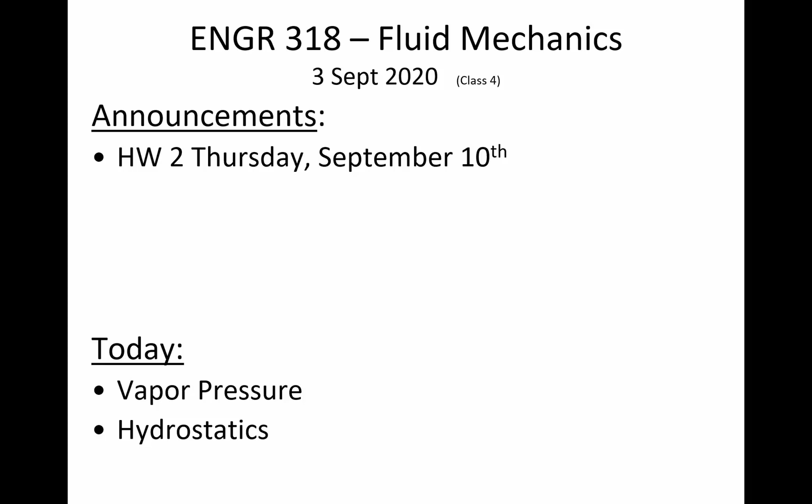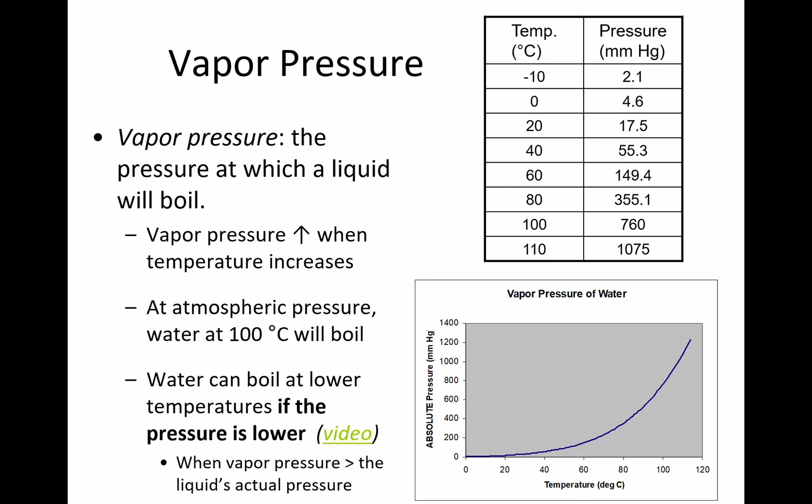If we're talking about vapor pressure, you really do need to know the temperature. Sometimes you could assume room temperature - that's a pretty default assumption. If you don't have any other data, it would be 20 degrees Celsius. But for vapor pressure problems, most of the time you will see a temperature specified.

Now let's look at a video of water being boiled. This is a little different from how you've seen boiling water before. You've probably boiled pasta, but in this video the person is going to boil pasta without heating up the water. They're going to do something different to boil it.

Instead of heating up the water, they're going to suck the surrounding atmosphere away from the water so there isn't air pushing down against it, allowing the molecules of the liquid water to escape more freely into the sealed vacuum above it. So let's take a look at this.

Okay, there we go. So if you have a liquid going into a gas, it cools off - it requires energy to do that. If you leave this running for a long time, the liquid will actually freeze. It's boiling, but the temperature is gradually going lower and lower because it's consuming kinetic energy to go into the gas phase. It's a complicated situation, but the main thing I wanted to point out is this concept of vapor pressure. This water is probably at 20 degrees Celsius.

In the back of your book there's an appendix table, Table A5, with vapor pressure values for a variety of different temperatures. One thing I failed to mention is that even when water is frozen, it still has some vapor pressure, and water does evaporate from ice, very slowly. In northern territories like Alaska and northern Canada, you can wash your clothes and put them outside on a line, and they'll freeze, but the water will eventually evaporate. That process of going directly from a solid to a gas is called sublimation. The vapor pressure of -10 degree Celsius water is 2.1 millimeters of mercury, so it won't evaporate quickly, but it will still evaporate.

So we looked at pasta boiling. Let's look at another manifestation of the vapor pressure of water. This video is taken in Yellowknife, Canada, one of the really cold parts of Canada. This person has a tea kettle of boiling water, and they're going to illustrate how quickly water can go into the vapor phase when there's a large differential between the air temperature and the liquid temperature. If the temperature gets down to maybe -10 degrees Fahrenheit, the water is going to evaporate really quickly.

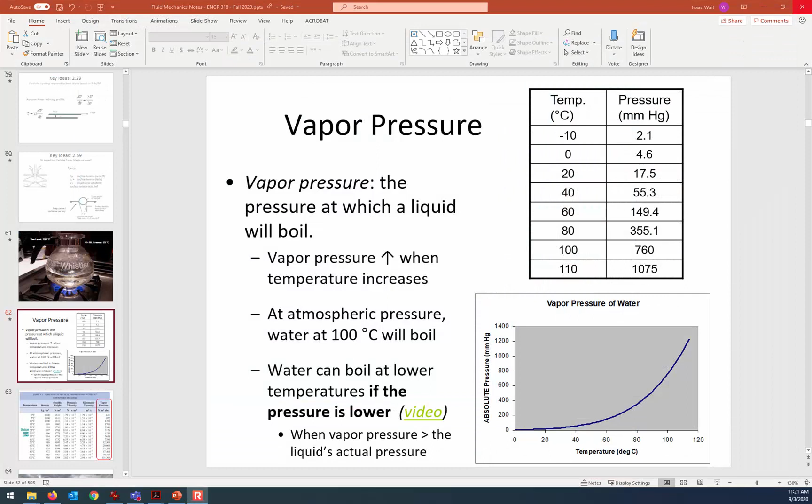Now this is interesting, but it has applications that go beyond just the gee-whiz of throwing water into the air or boiling pasta at room temperature. There's more to it than that. One of the really important engineering implications of vapor pressure is a process called cavitation. We're going to talk about what cavitation is and some of the problems it can cause by looking at a case study of a dam in Russia.

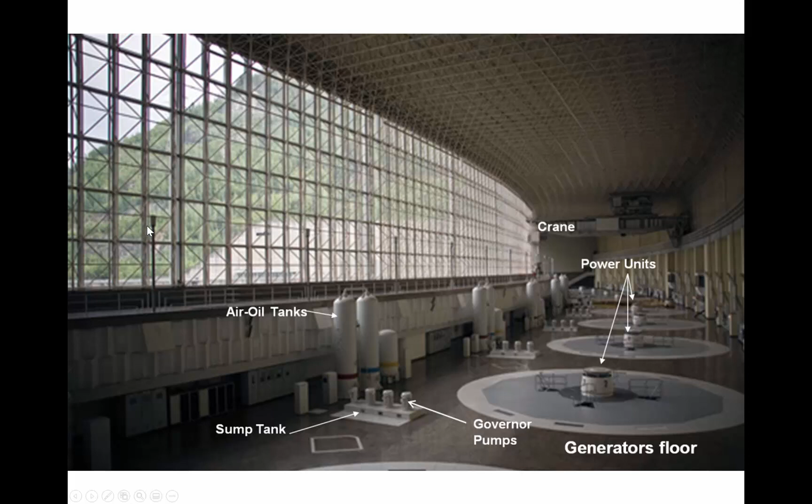This is a dam that generates quite a lot of hydroelectricity in Russia. I'm not going to attempt to pronounce its name because I don't speak Russian, but you can see the power lines coming off of this dam are an indicator that it's an important source of electricity for the industry in that part of Russia. This is a before photo. That's ominous, right?

There are generators built into the floor, and the way the dam works is that water goes through these pipes and moves at a very fast speed. The difference in elevation between the reservoir behind the dam and the water downstream, combined with the flow of the water, creates a pressure and spins the turbine in these generators. The spinning turbine is converted to electricity. It's hydroelectric power, and we have a lot of hydroelectric power in the United States as well.

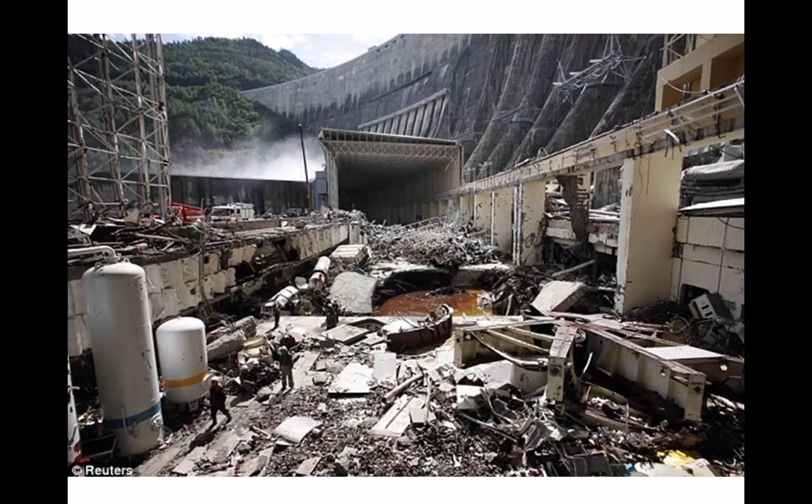This is the after photo of that same location. The only thing that survived, if you look at these tanks, the air oil tanks with the yellow stripe and the blue stripe - okay, here it is, yellow stripe, blue stripe - we still have those tanks, but there's really been a lot of damage. It almost looks like some sort of an explosion. What happened was that the water was moving so quickly through the penstock, which is the name of these pipes in a dam, that carries the water from the reservoir to the turbine.

When water is moving at a really high velocity, the pressure decreases. We'll talk about the details of that when we discuss the Bernoulli equation, which basically is a way of quantifying the relationship between increased velocity and decreased pressure. The pressure of the water going through these penstock tubes became so low that it was lower than the vapor pressure of the liquid. The water was moving so fast through those pipes.

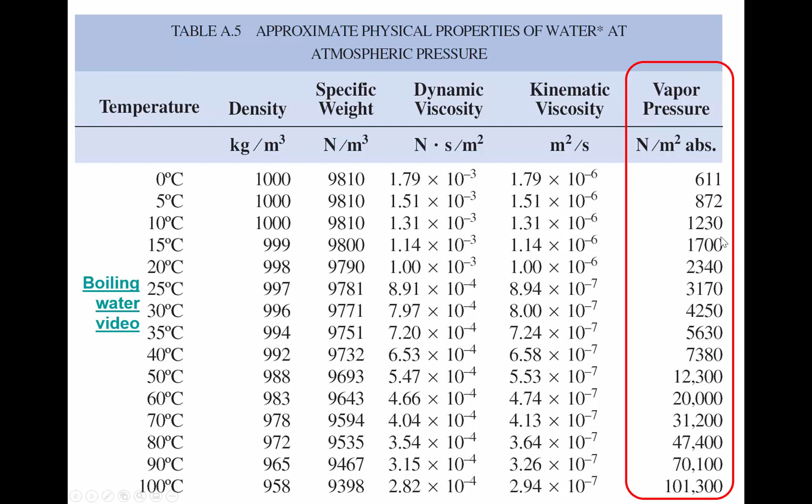I guess it was very rainy in the watershed upstream of the dam, so they had to pass a lot of water through the dam. That dam had been in place for a long time, but this was a unique set of operating circumstances where I think they had one of the turbines closed for maintenance, so water wasn't going through all of the penstocks. There was a greater amount of flow going through any single penstock than there had been before. So the velocity was high, the pressure came down, and the water started to boil inside of that concrete tube.

It wasn't hot, it was boiling in the sense that there was an expansion of liquid water molecules into gaseous molecules. When that gas hit the generator, it caused little shock waves as the gas bubbles collapsed, and it gradually started to scour and erode both the concrete and the steel. It became a real acute failure when the scour and erosion caused an imbalance in one of the fast spinning generators, and from becoming imbalanced, it just ripped right up out of the floor and destroyed everything else.

So the take-home lesson of this case study is that if the absolute pressure of the water falls below the vapor pressure, then cavitation will occur.

Cavitation isn't just something that happens at dams in Russia. It's an effect we see elsewhere. The U.S. Navy is really concerned with cavitation because when you turn the propeller of a submarine or a ship very quickly, when you're accelerating that ship or submarine, little vapor bubbles form on the edge of the propeller, and they can be very noisy. In the case of a submarine, the noise of those bubbles forming and then collapsing is enough to give away an otherwise silent submarine's location. Submarines are always trying to be very stealthy and quiet, not detected, so if there's cavitation on the screw, it can give away their location.

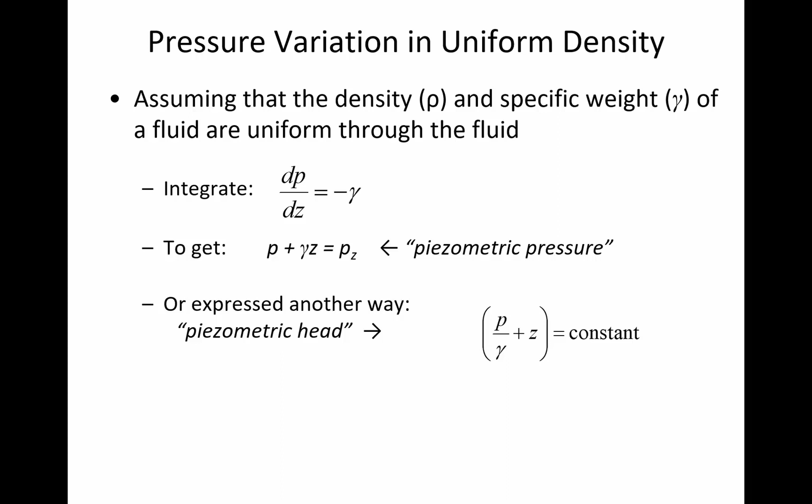So that's piezometric pressure. You can express piezometric pressure a different way if you divide each term by gamma. So pressure divided by gamma plus z, that's piezometric head.

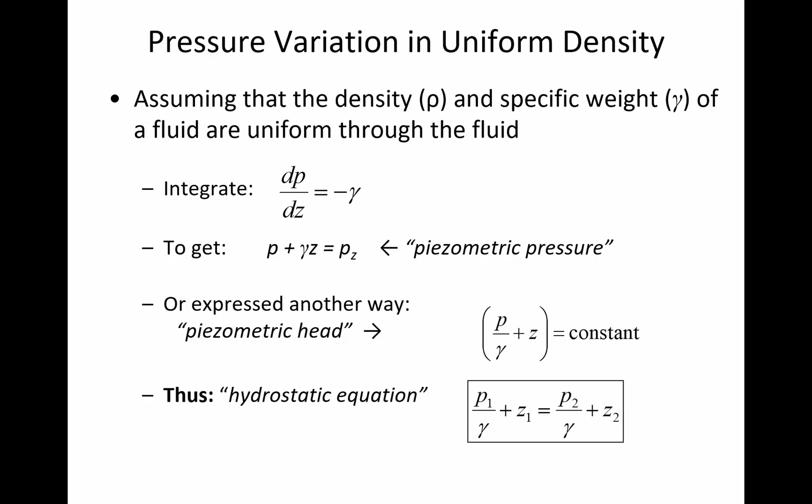So the hydrostatic equation allows us to choose two different points in a fluid and predict how the pressure and elevation is going to change in relation to those two points. So if you know in two locations the pressure, and at one of them the elevation, then you can calculate the elevation of the second location. Any one of those terms can be an unknown.

And so what I mean by that is if you have a tank like this, and let's say location 1 is 34 meters above a datum.

The datum can be the bottom of the tank, sea level, or even the surface of the liquid. It doesn't matter what we use as our basis point for measuring elevation, as long as we use that same basis point for both location 1 and location 2. As long as we're consistent, it doesn't matter which is which.

So let's assume that this tank is at sea level, and we want to know at location 2 what's the gauge pressure and also what's the absolute pressure. Remember on Tuesday we talked about the difference between gauge and absolute pressure. If you don't remember, I'll refresh your memory as I show you the solution.

What I'd like you to do is try substituting the numbers into this formula. Hopefully you've got a calculator handy and a writing instrument so you can jot this down in your notes. Given P1, given Z1, and since this is water, the gamma is 9810 newtons per meter cubed. Solve for P2 using the formula.

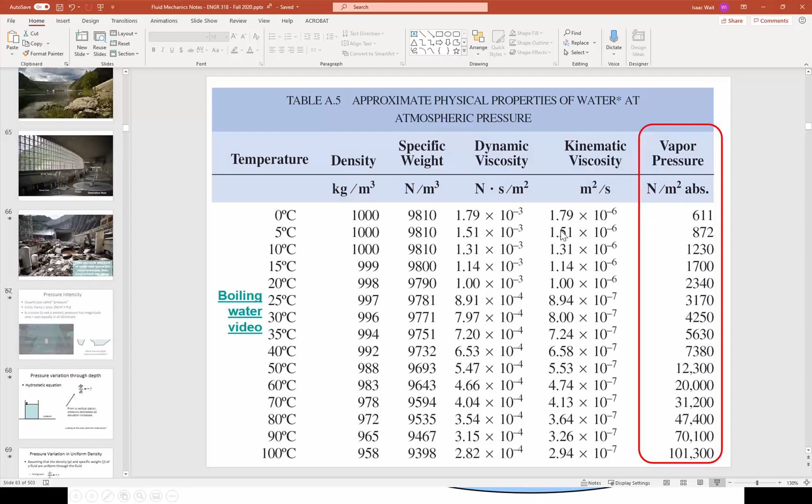Let me bring the solution up onto the screen so we can compare. Peter confirms. All right.

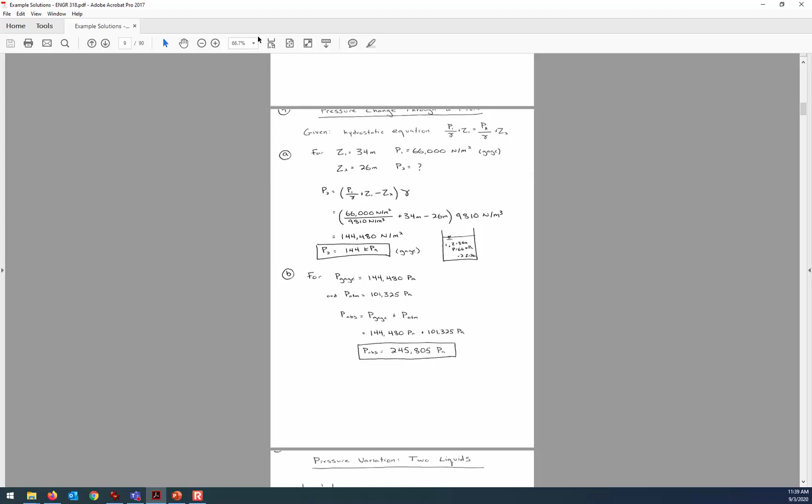So our hydrostatic equation is here, and we're given a Z1 of 34 meters. The given gauge pressure P1 is 66,000 newtons per meter squared. The problem statement said newtons per meter squared, but it could have just as easily said pascals, or if it said 66 kilonewtons per meter squared, that would mean the same thing. But to put it into the formula, you need units that will cancel out correctly. If it said 66.0 kilonewtons per meter squared, you'd need to change it to 66,000 newtons per meter squared, because later you'll be dividing by gamma, and you can't have kilonewtons in the numerator and newtons in the denominator. You need to be dimensionally consistent, which is why it's a good habit to include units any time you define a variable or substitute it into a formula.

So if we look at the solution, I've rearranged algebraically to solve for the unknown, P2. Rearranging our original hydrostatic equation and solving for P2, it becomes P1 divided by gamma, plus Z1 minus Z2, all multiplied by the unit weight of the liquid.

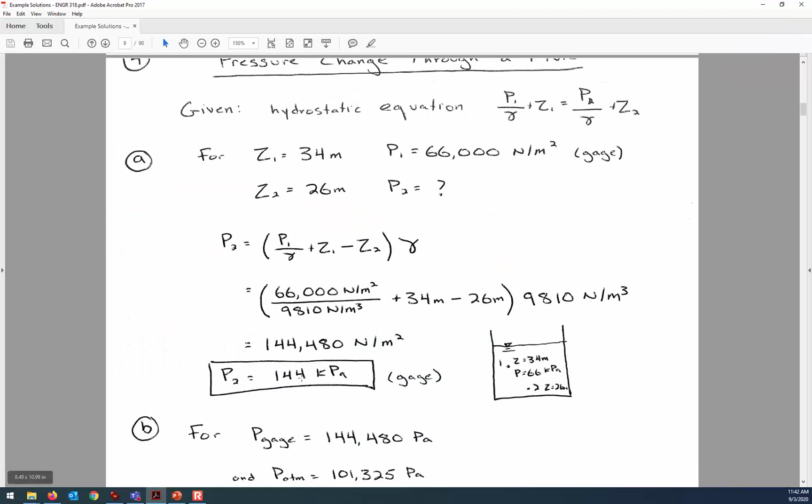That's gauge pressure. Absolute pressure is when we say the Earth doesn't have zero pressure -- well, it has zero pressure compared to itself, but compared to the vacuum of space, it has 101.325 kilopascals. So the conversion between absolute and gauge pressure is that we add the atmosphere's pressure on. If this is at sea level, the atmospheric pressure is 101,325 pascals, so the absolute pressure is 245,805 pascals.

Did you get that one, Peter, too? Absolute pressure.

All right, so be sure that when you have a homework problem, you take a look if it says gauge or absolute. Eventually it'll just say, what is the pressure, and the default typical assumption is that you're using atmospheric as the reference point. But we use absolute pressures for problems that include the gas laws.

So I'll sometimes call this the full hydrostatic equation. Can I see the solution again, please? Thank you. So this formula: absolute pressure is gauge plus atmospheric. So if you knew gauge and you know P atmosphere, you can find the absolute pressure.

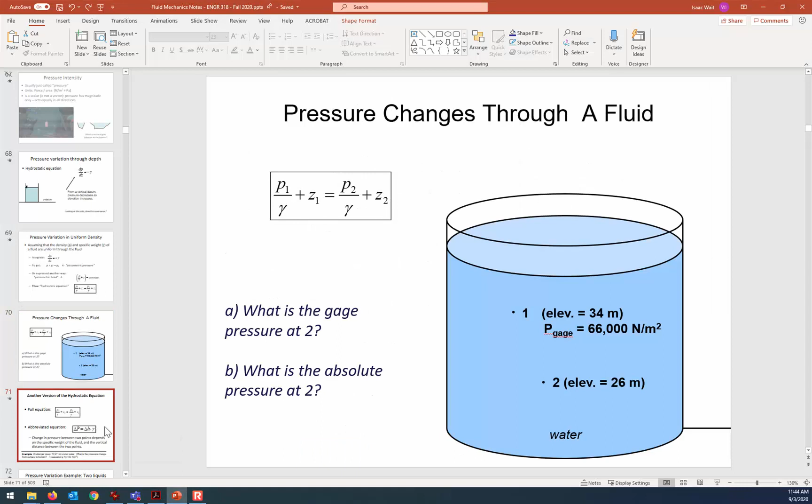The full hydrostatic equation is sometimes simplified into an abbreviated format: delta P equals delta H times gamma. This abbreviated format is just saying what's the change in pressure between two locations. So rather than solving for P2 in direct terms, you're just finding how much the pressure changed.

You may remember this is the equation I used on the first day of class when we were doing that Challenger Deep problem. I said that the pressure at the bottom of the ocean was its depth multiplied by gamma.

Now, by the way, the gamma for seawater is different from the gamma of regular water. If you look up in the back of your book, it has the density and unit weight of seawater. Whereas normal fresh water is around 9790 newtons per meter cubed for room temperature water, seawater, because it has salt dissolved in it, has a higher density. And so is the unit weight. The unit weight of seawater, I think, is around 10,100 newtons per meter cubed.

So if you have a problem, for example, one due on Thursday of next week that mentions the ocean or seawater, then what you'll need to do is look up the unit weight in the back of your book to find out the gamma that applies.

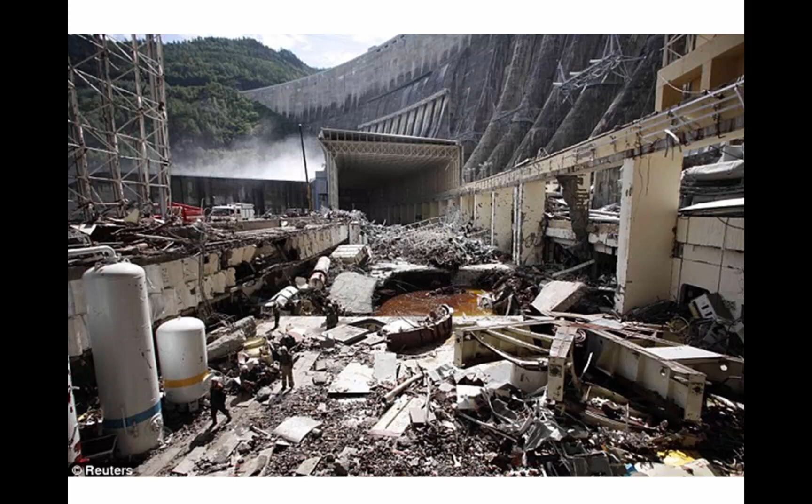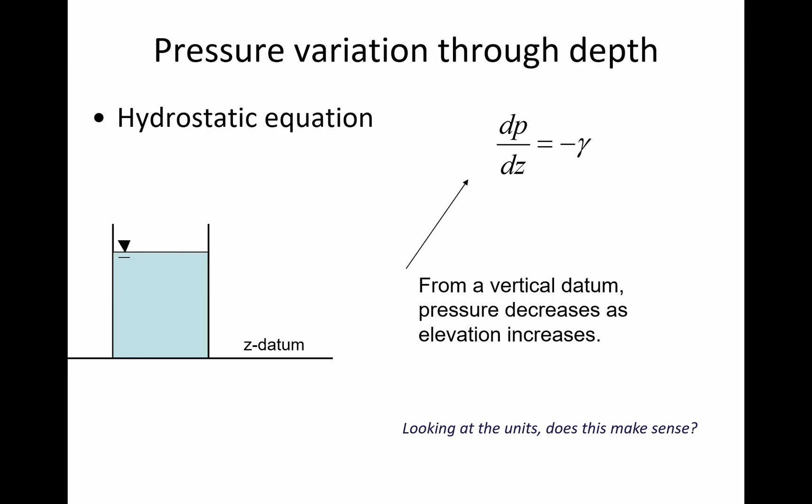So delta P just talks about a change in pressure as you change the depth. Remember, our original formula of the hydrostatic equation had this negative sign. The negative sign tells us that as you go down through a fluid, the pressure increases. As you go up through a fluid, the pressure decreases. So this abbreviated formula, we have to apply the same trend. If you go down through a fluid, the pressure goes up.

So you would solve this one. Let me get my calculator handy. It's the delta H, which is 10,911, multiplied by 10,100. I wish my calculator put commas in because this is a big number—it looks like 110 million. So 110 megapascals at the bottom of the ocean with seawater as the unit weight. It's 110 megapascals higher pressure than it is at the surface.

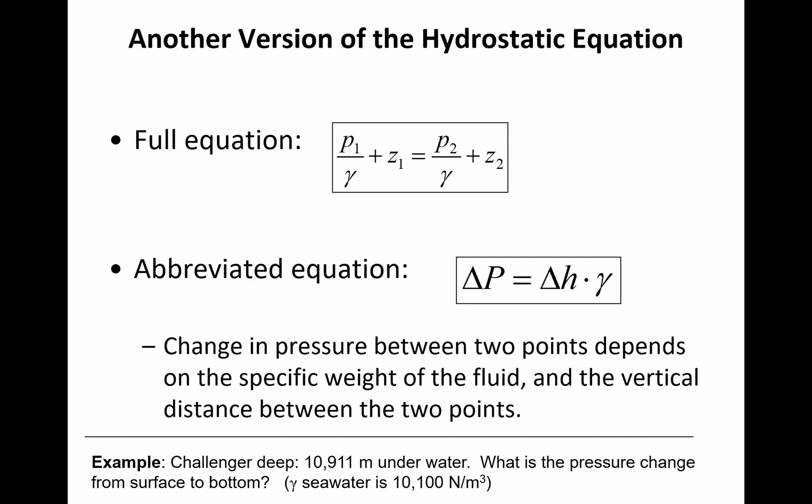Earlier there was a question: what if it's two different liquids? What if you have two different kinds of liquid because they're not going to have the same unit weight? What do we do there? Well, this is that very case. You apply the hydrostatic equation in steps, and the pressure is additive.

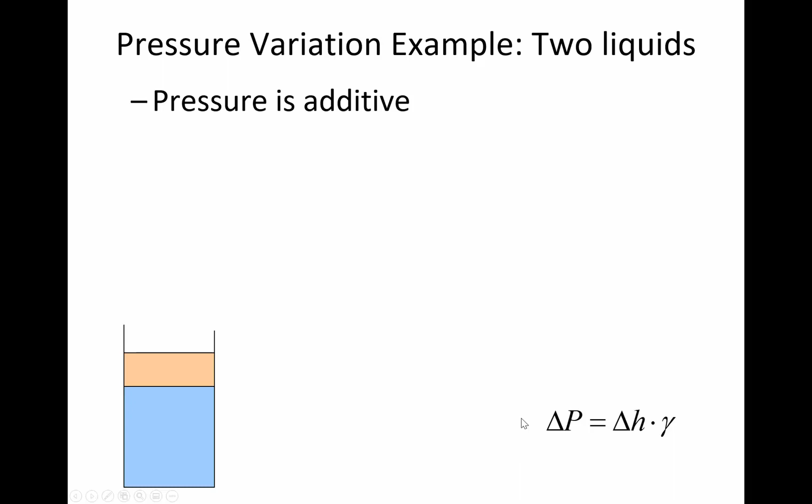Let's say we have oil, a layer of oil floating on top of a layer of water. As the problem statement says, the specific gravity, Sg, of the oil is 0.75. Below that is water. We want to know what's the gauge pressure at the bottom of the tank. Gauge pressure means assume the pressure at the surface is 0—assume that the pressure of the air and the oil at the surface are the same. So we're using our atmosphere as the 0 point.

We want to go down through the fluid and find out what is the pressure at the bottom. Now be cautious here. It says that the total level of liquid in the tank is 4 meters, so be cautious about how you dimension this. My suggestion is... let's see, I don't think I have it dimensioned.

If you have this printed out, sketch it, or if you don't have it printed, you can just write it on a scratch piece of paper. Write the dimensions, like the thickness of the liquid layers, directly onto the sketch. Then try and find out the delta P—what's the pressure at the bottom of the tank?

You have to do it in steps. First, find the pressure change through the oil, then find the pressure change through the water, and then the total pressure change is the sum of those two.

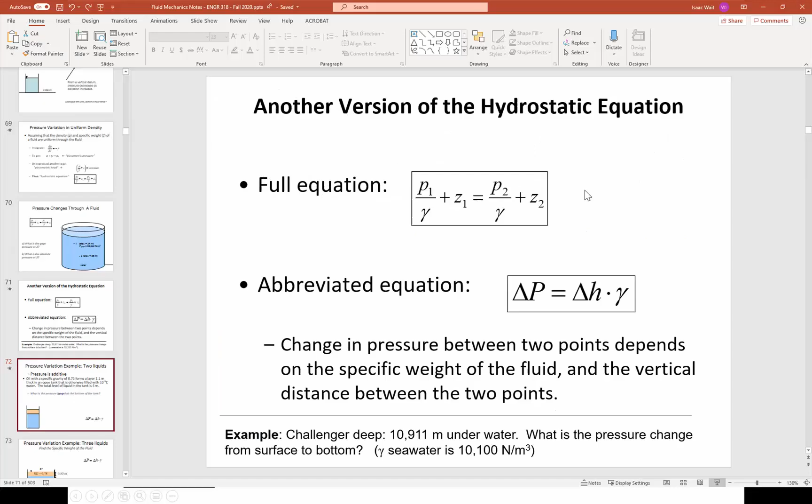So you can see I did this preliminary work at the beginning. I found the unit weight of the oil because I know I'm going to need it. The unit weight of water is 9810 newtons per meter cubed, and the unit weight of the oil is 0.75 times that, because the problem statement told me the specific gravity of the fluid. So the specific weight is specific gravity times the specific weight of water.

Now, did you get the dimensioning correctly? If the total column of liquid height is 4 meters and the oil layer is 1.1, then the water layer is 2.9 meters. That's sometimes a stumbling block. If you don't pay special attention to the description of the layers, you may accidentally think the water layer is 4 meters, but it's not. It's saying the total liquid level is 4 meters. So that's where these dimensions come from.

So now I'm progressing. I start at the top, and I know the pressure at location 1 is 0. You'll notice I've put the labels location 1, location 2, location 3, and those spots correspond to an interface. Location 1 is at the interface of air and oil. Location 2 is the interface of oil and water. Location 3 is the interface of water and steel tank.

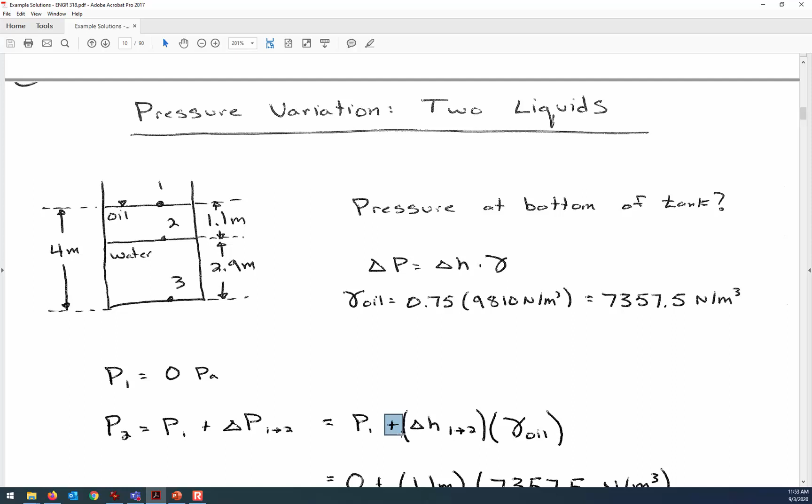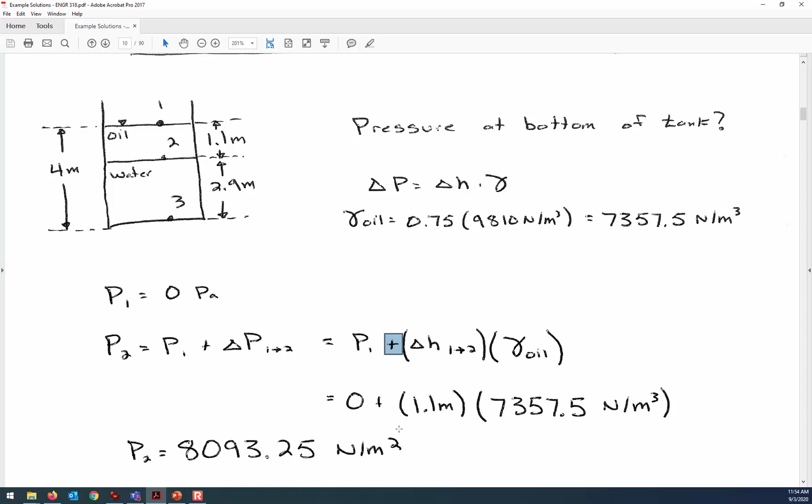If the pressure at 1 is 0, then the pressure at 2 is however much pressure there was at 1 plus the change. Since we're going down from 1 to 2, it's an addition, so we add the pressure change. The pressure change in that first segment of 1.1 meters of oil is an increase of 8093 newtons per meter squared. That's how much the pressure goes up in the first layer.

Now the pressure at location 3 is however much pressure there was at 2 plus the change. The change is the delta H from location 2 to 3, so that's 2.9 meters, going downward through the water, and we use the water gamma, not the oil gamma, because between 2 and 3 we're passing through a liquid layer of water. So in the end, the final pressure is 36,542 pascals.

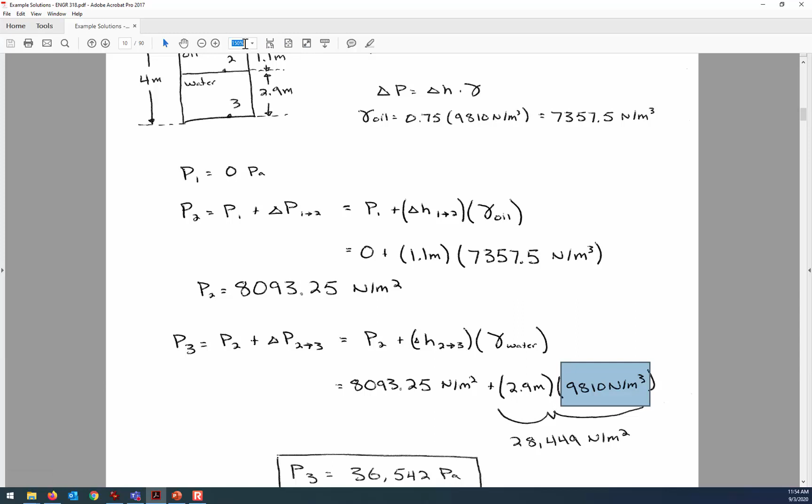Here's the entire look of that problem. Any questions about this example? Okay.

Well, let's make things interesting. That was 2 liquids. What if we make it 3 liquids? Let's say, for example, that we have a layer of oil, and there's a layer of water, and then a layer of some unknown fluid.

We can use the hydrostatic equation to find out what's the unit weight of that unknown fluid, because we have measured a known pressure. So what this problem is saying is we know the pressure at a certain location that is 0.8 meters lower than the interface, the pressure is 45 kilopascals, and that's the gauge pressure. What we want to find is solve for gamma.

Your process is the same thing I did in my example where I had locations. Remember how I labeled it? Location 1, location 2, location 3. Do the same thing on this next problem. Try and identify different locations. The way that I did it was I called them location 0, location 1, location 2, and then location 3 is at the elevation of that known pressure.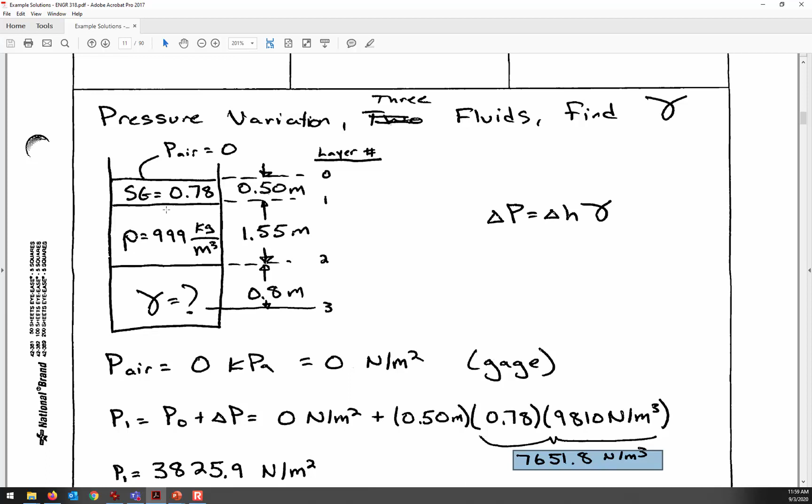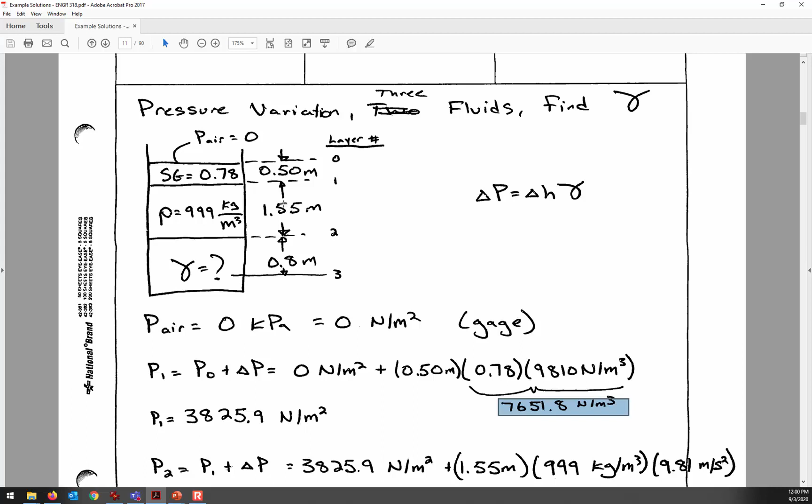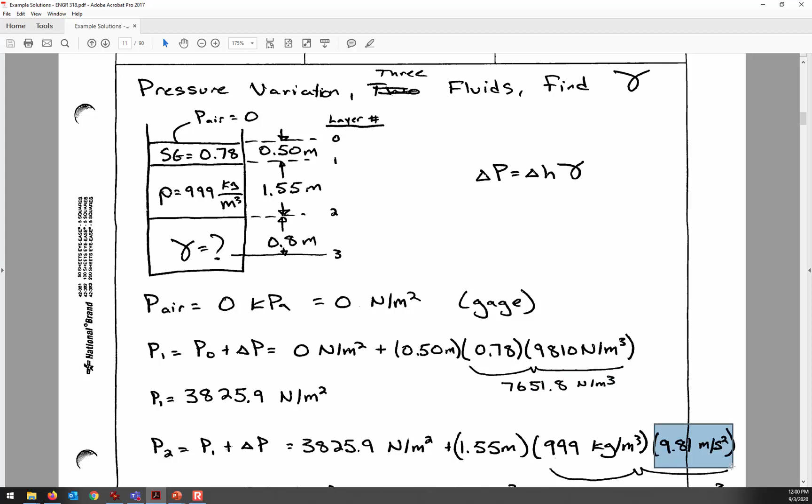And then now we just go down again through another segment of the fluid. So now we go down from 1 to 2, and it says here that the density is 999 kilograms per cubic meter. So to use that given density, we have to multiply it by G in order to get gamma. Remember, gamma is density times G. So the unit weight of this fluid between 1 and 2 is 9800 newtons per meter cubed.

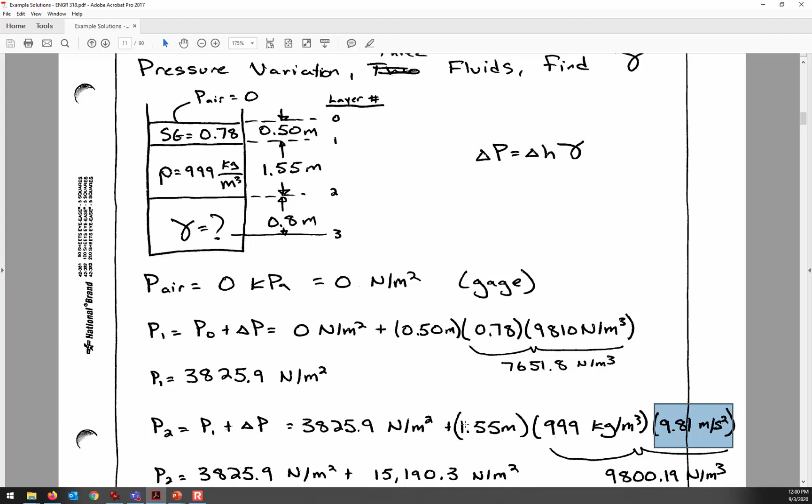And so if you go down 1.55 meters of that, we now have the pressure at location 2 specified. The pressure at location 2 is 19,016 pascals.

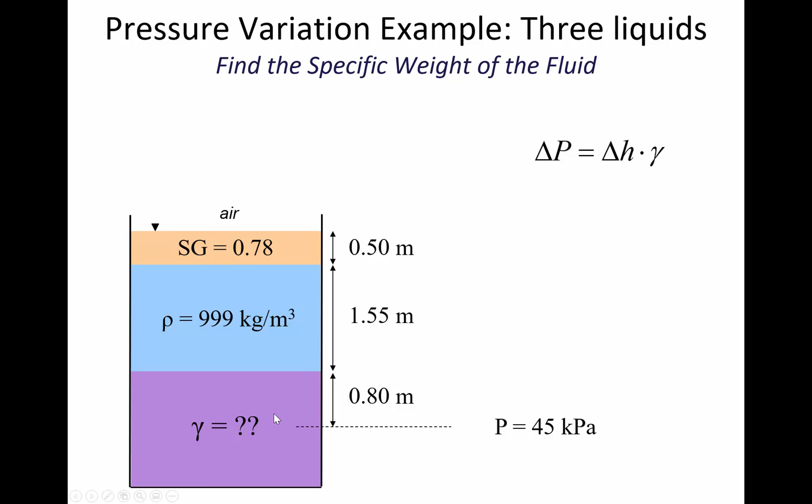All right, so we started off by knowing the pressure at 3. That was given. The pressure at 3 is 45 kilopascals. So far we've calculated the pressure at this layer, the interface between the water and whatever this purple stuff is. So P2 is 19,016 newtons per meter squared, and P3 is 45 kilopascals.

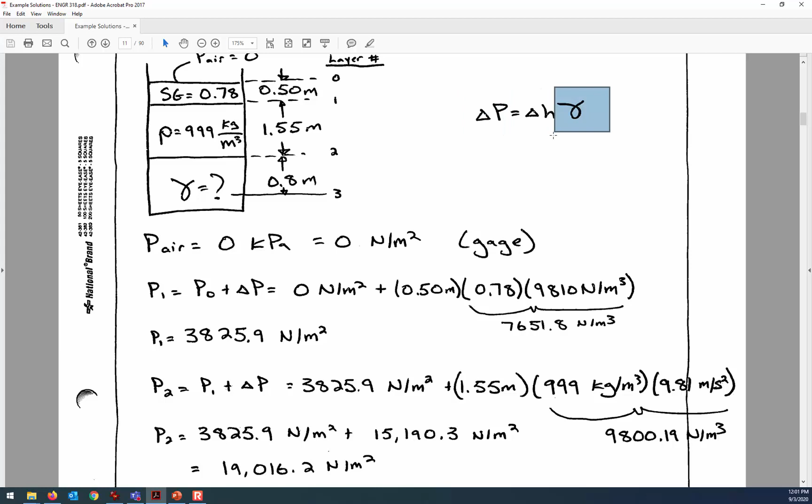So here's our hydrostatic equation. We don't know gamma, but we do know delta H. Delta H is 0.8 meters, and the delta P we're going to get is the difference between 45,000 and 19,000. Then the only unknown will be gamma. So it's an equation with 3 variables, 2 of which are defined. So rearranging to find the... let me zoom out a little bit more so you can see that in context.

Okay, so the delta P that's going to go into our hydrostatic equation is the pressure change between location 2 and location 3. So the change in pressure is essentially 26 kilopascals. Here's the change in pressure divided by delta H, and that enables us to calculate gamma. I think you have a homework problem similar to this where you are determining the unit weight based on a pressure change you could determine and an elevation change that you can measure.

Does this make sense to everybody? Do you have any questions about what we've done? Instead of finding the unknown pressure, we've measured the pressure and solved for what unit weight must have caused that change in pressure. Any questions?

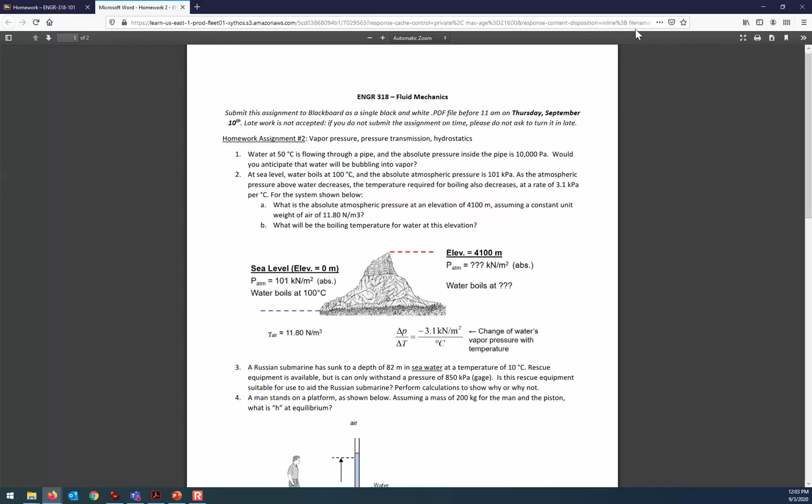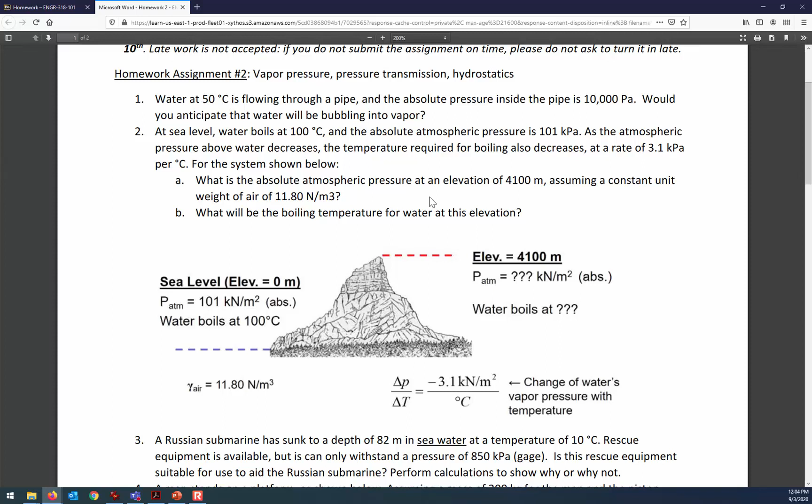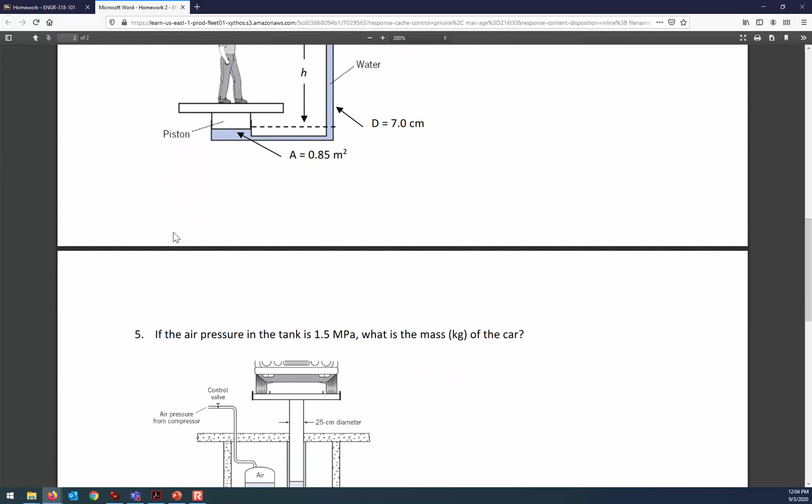So we've got a vapor pressure problem for problem 1, another problem related to vapor pressure and boiling for problem 2. Problem 3 is about the hydrostatic equation. Some of the rest of this pressure transmission. So starting on problem 4, we'll get to that in Tuesday's class. But problems 4 and 5 you can do after next Tuesday. But you can solve problem 6.

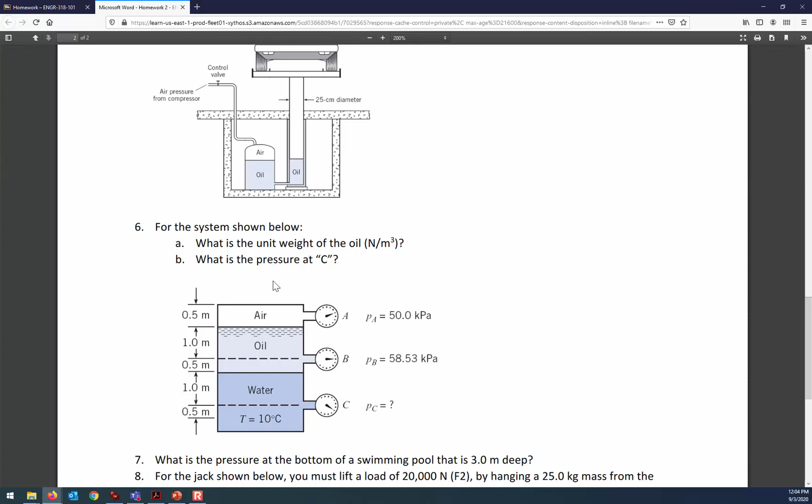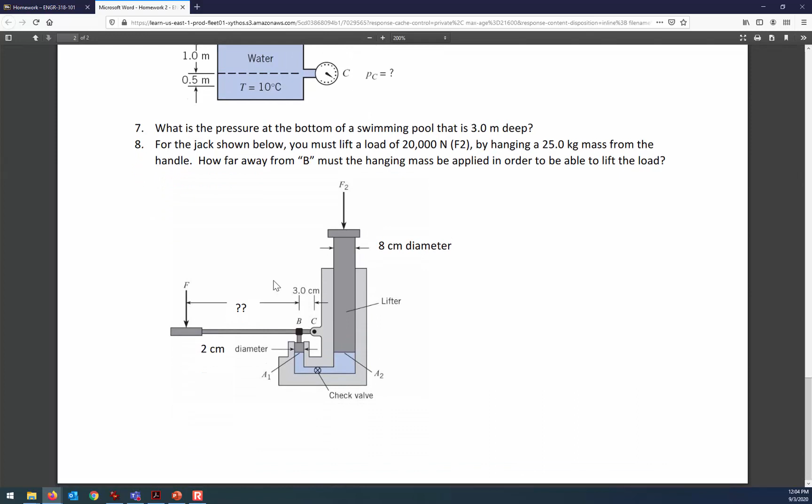This is very similar to what we've just done, where you're applying the hydrostatic pressure through several different fluids. Problem 7 is hydrostatic pressure. Problem 8 you can't do yet; we're going to learn that stuff on Tuesday with pressure transmission. But about half the problems you're able to get an early start on if you want a little extra fun over the weekend.